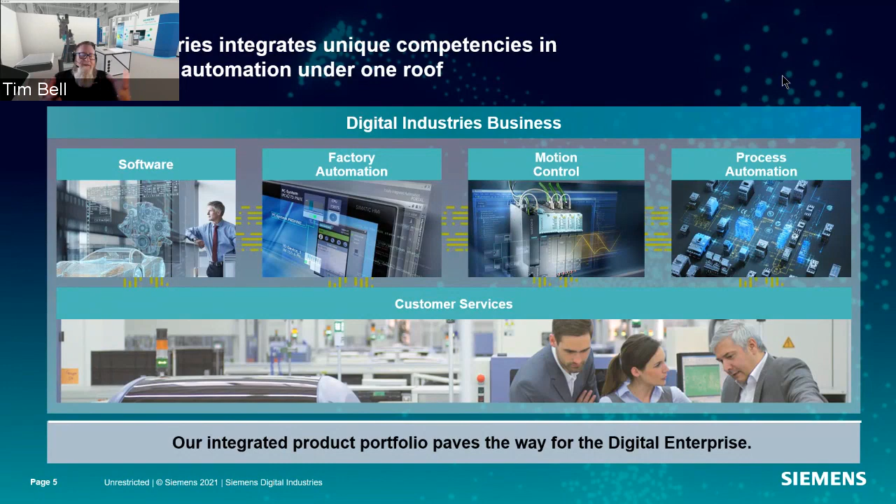Why Siemens Digital Industries? I won't go through all this, and we'll make the slides available afterwards. But basically today we ship about 10,000 PLCs daily, as the number one leader in PLCs, number one in industrial software, factory automation, and motion control. And I think what's most interesting on this slide is the global domain expertise. We have over 12,000 industrial software engineers and over 20,000 automation engineers. Siemens is very dedicated in supporting our customers in this journey.

Additive manufacturing is a core technology for Siemens as a supplier of end-to-end software, automation, and digitalization solutions. What a lot of people don't know is we have more than 10 years experience in using additive manufacturing, as well as being a service provider with our facility of Materials Solutions in the UK. Today we have over 150 industrial AM machines. I can tell you that about 75 of these metal powder bed fusion machines run 24/7 running production components.

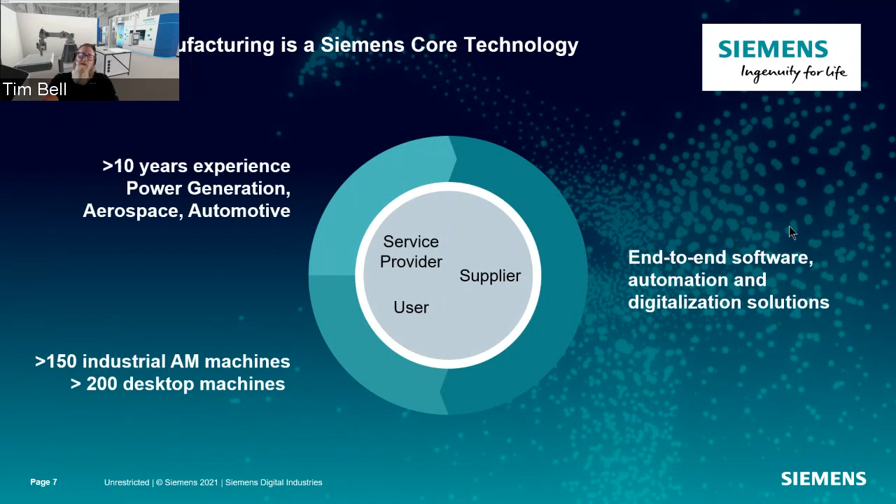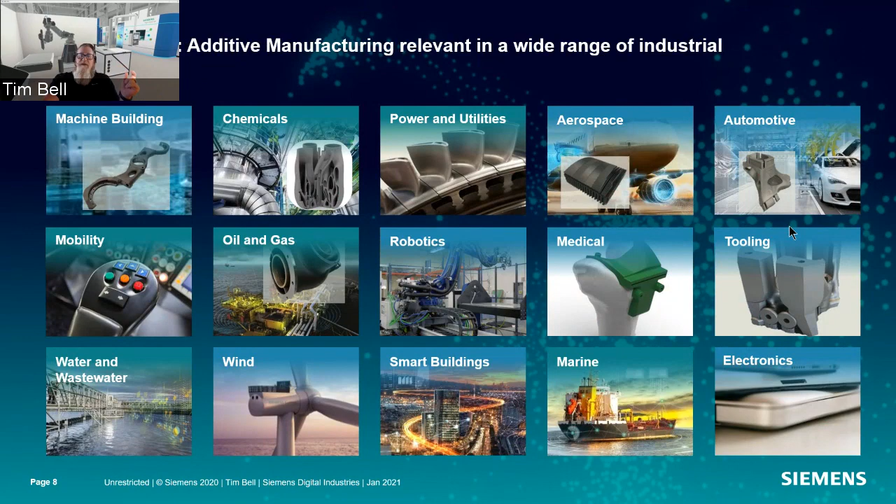We've got way more than 200 desktop machines floating around the world. I think we're getting closer to about 450 total machines globally now. When you talk about additive manufacturing, it's relevant in a wide range of industries, from machines to power to aerospace, automotive. I mean, it just runs the gamut. What a lot of people don't realize is there's even additive manufacturing components in some consumer electronics like the phone in your pocket. Yes, the answer is additive can do high volume production.

As it being a core technology for Siemens, we've taken things within our own and we've built tools around our own use of additive, and now we're bringing them to the customers out in the world. One of those examples is this conventionally manufactured burner. So this is a burner tip for a large gas turbine engine. It's traditionally made from 13 machined parts joined by 18 welds with thermal barrier coatings. And a big point there is 26 weeks lead time. Whereas optimized, designed as a single piece to be 3D printed, it's a 3-week lead time.

This is massive in the repair and service industry of gas turbine engines. To be quite frank, there's not a lot of brand new engines being sold in the world as we're trying to push away from fossil fuels to create energy. But there's so many engines out there that need service, and we're looking for better ways to make these engines more efficient, better performance, and get service parts out faster. So we leveraged additive here.

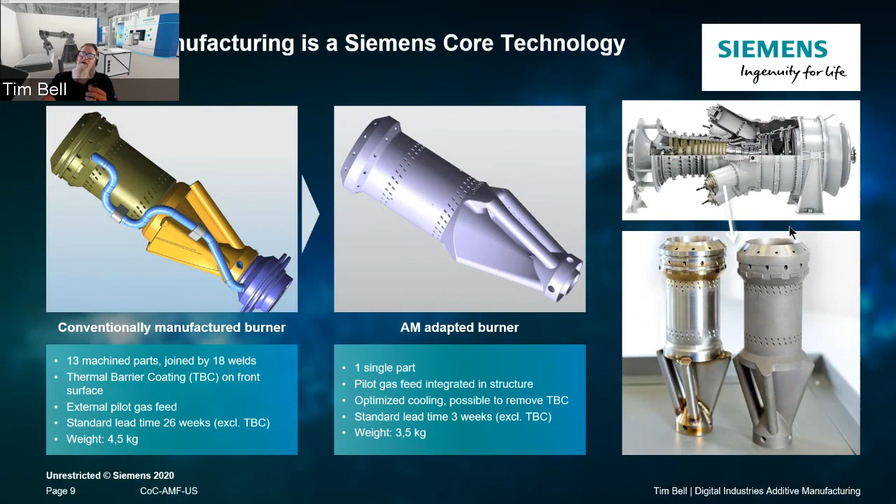Another place that Siemens has leveraged additive is within our mobility, where we make trains, our biggest market within mobility. We have 8 locations now, and over 800 parts are available for on-demand printing, meaning that a service technician can go into the train, have an iPad, pull up the component that's broken, even by just taking a picture of the component, and then the system will tell the customer, hey, you can print that on demand, and here's a pickup location. So today we've printed over 8,000 parts for our mobility group with over 100 satisfied customers.

This is where I talk about how we drink our own Kool-Aid or eat our own dog food. We use this for ourselves and for our customers, and additive has such a broad range of applications for us. Another area is our Healthineers group. These folks are responsible for building CAT scan systems, X-ray systems, sonogram systems, a lot of very complex medical machinery. And that team has utilized additive for rapid iteration, rapid tooling, things like that. So it's amazing to see, in this top picture on the left, the home style MakerBot or Ultimaker there. These machines are used every day in product design within Siemens.

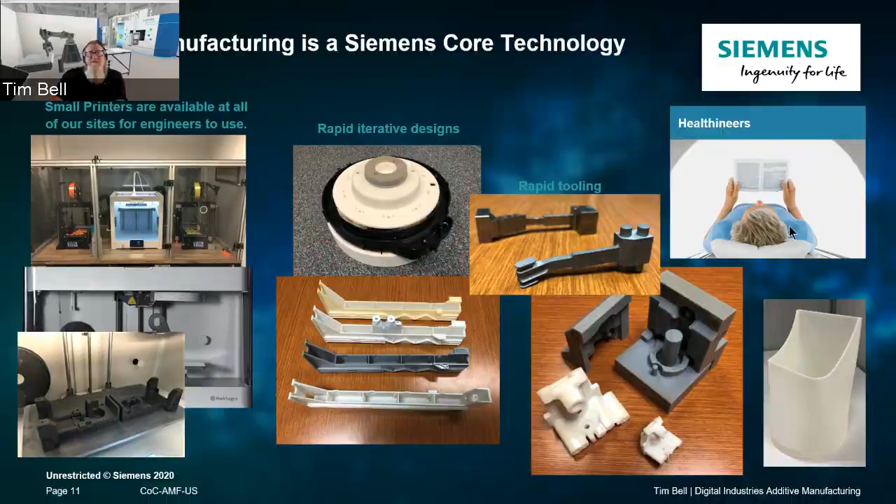So what are the drivers for industries? They're all different. Every industry has a different reason to look at additive manufacturing. It'll be product transformation or manufacturing transformation. Reimagine your products, scan to product, reduce weight. You can rethink your business, individualization, personalization. There's a new buzzword out, mass customization. We have tools to allow our customers to do that every day. But I think reinventing manufacturing is a really solid place to look at for eliminating molds and casting and tooling, simplifying assembly processes. Additive is used for so many of these things.

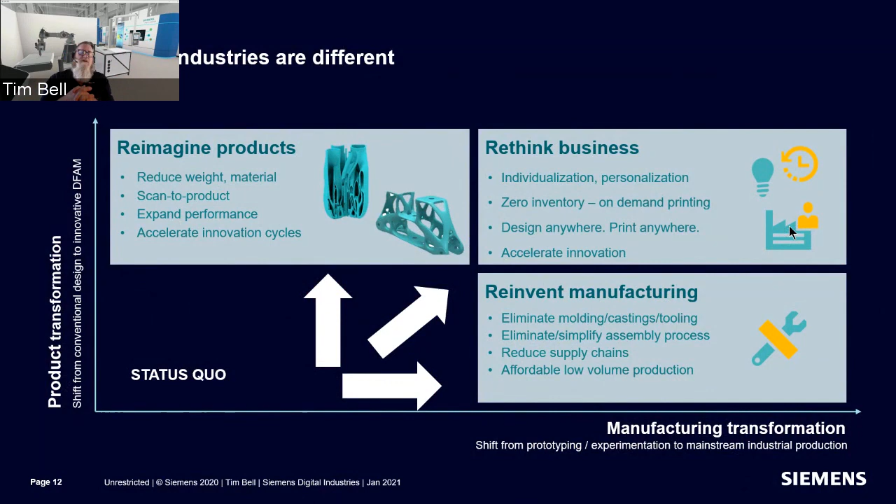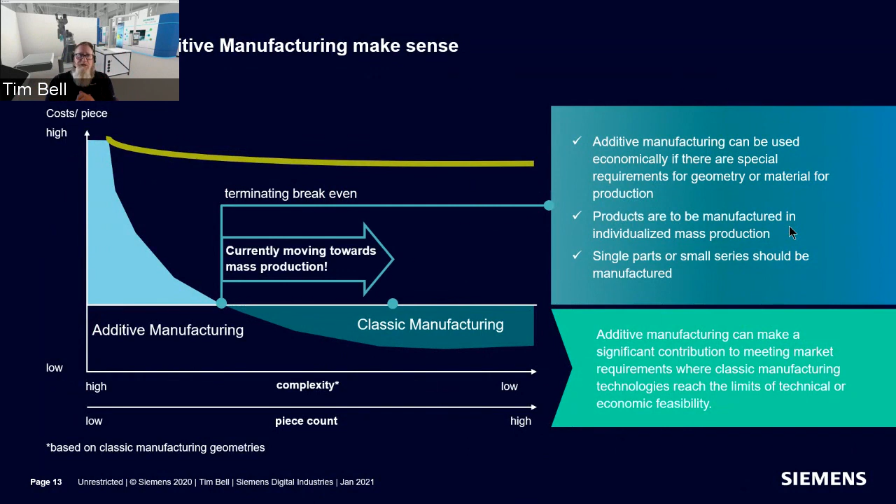Where does additive make sense? Well, it's typically in high complexity components that have a high value. But what we're seeing over time is the additive technology is being enabled by digitalization to move towards mass production. If you follow additive manufacturing news, you saw recently where ExOne, one of our great customers, announced their development with Ford, where they productionized binder jet with aluminum. This is a huge step towards additive going to mainstream mass production. The market's growing strongly. The CAGR for the additive market is about 25% annually. This is huge. This is massive. This tells us that it's on the way to becoming mainstream.

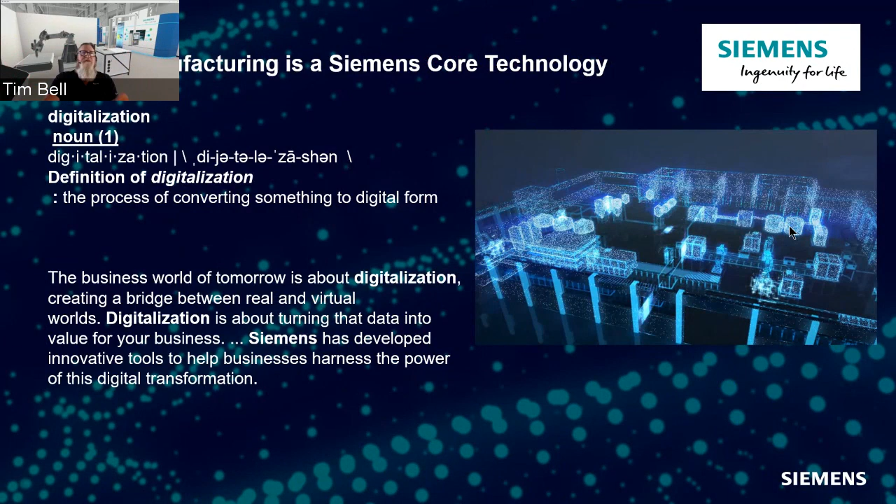So how do you leverage digitalization for additive manufacturing? Well, let's look at digitalization. It's a pretty basic definition: the process of converting something to a digital form. Well, that's kind of misleading. You can't just convert it and say, oh, I've digitalized my manufacturing process. What Siemens has done is given you the ability to connect the virtual and the real world. This is digitalization. We're so used to designing components in CAD systems, and then we move that over to software, do simulation, and then we send it to the shop floor, and that machine's disconnected, and we try to put all these pieces together to make a solid manufacturing process.

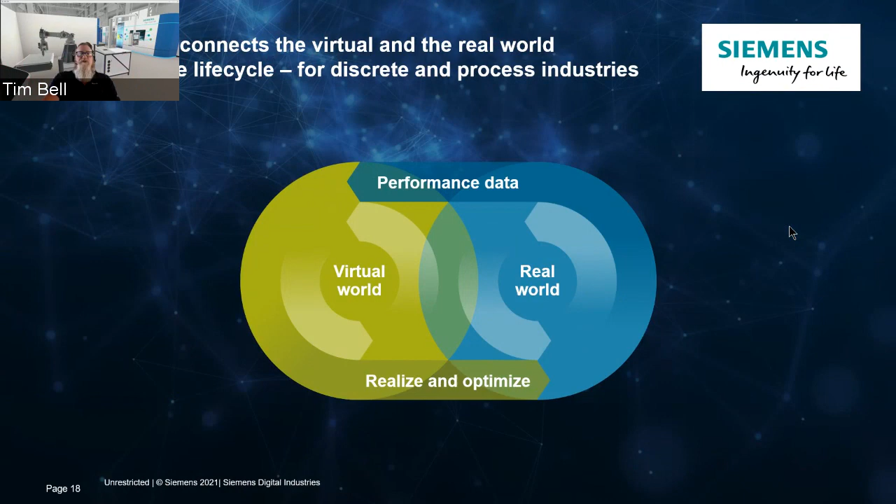Unfortunately, today we don't have that in the additive world, but Siemens is bringing that to the forefront today. The barriers to additive manufacturing are the same as other ones. It's what I just said: design, simulation, print preparation, the process, heat treat, finishing, inspection. All of these are a disconnected process chain.

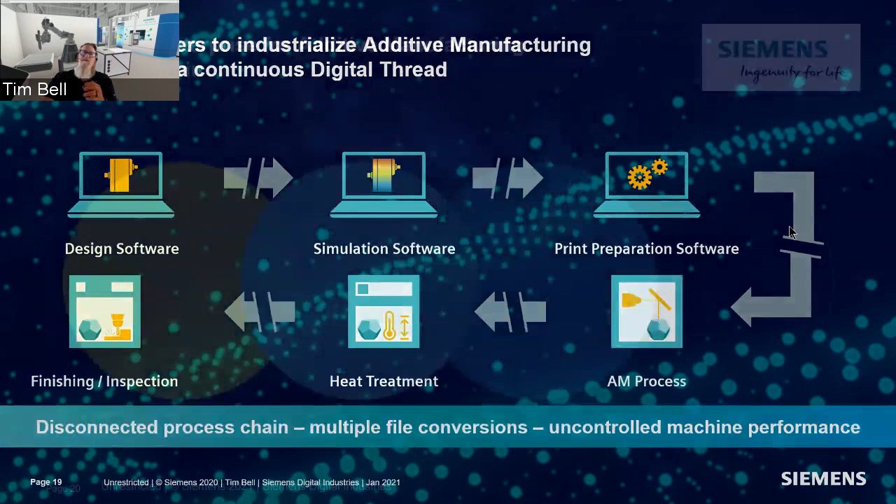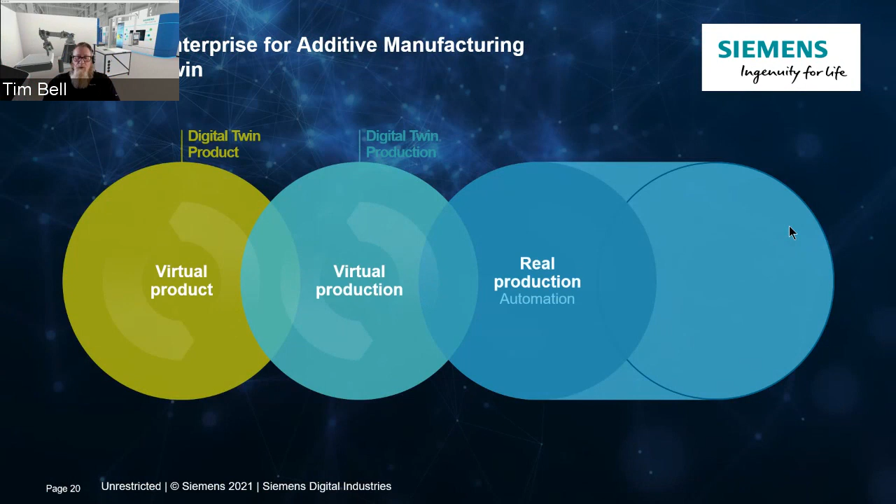So many different platforms. What Siemens has done is we've tried very, very hard to create a digital enterprise, allowing you to, I don't want to make this a software pitch, but basically go into a software platform and stay in it for the entire path. So from cradle to grave, and then more importantly, the digital twin performance. So feed that performance data back into the virtual product. And I'm going to show an example of that here.

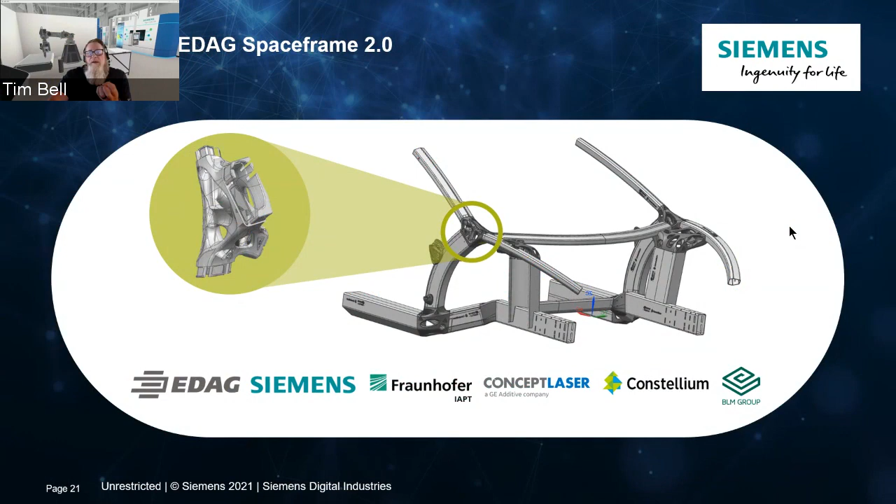So let's start out with a digital twin of the product here. So I took an example here. This is an automotive space frame component. So you see there's a node or a module there where some frame tubing is connected, and the module there is 3D printed. So digital twin of the product. We start out with designing the product.

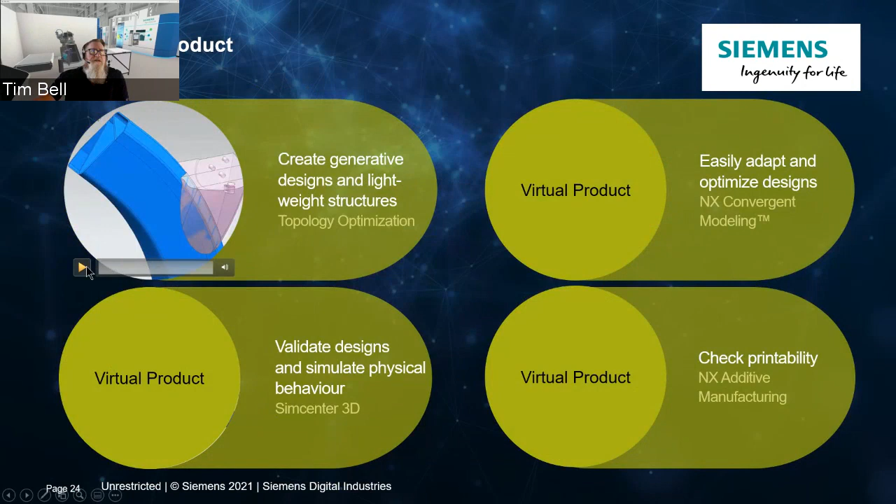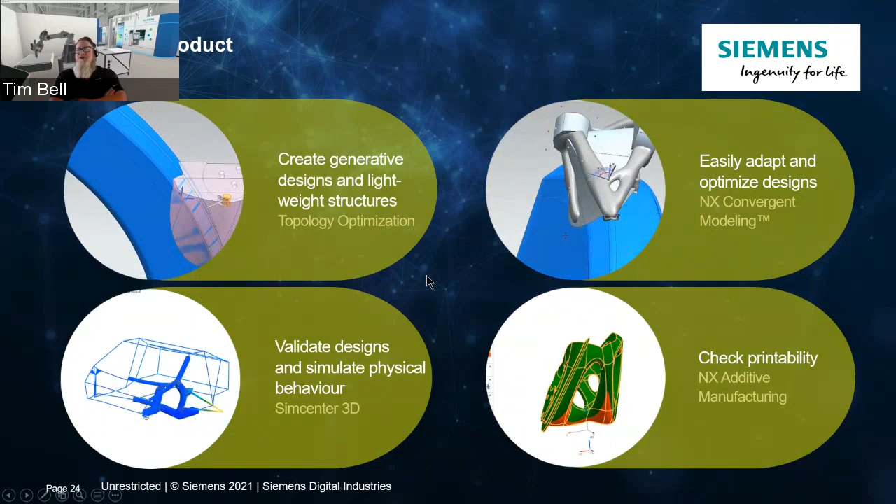We're going to use generative design, topology optimization, and then we're going to take that design and bring it into convergent modeling, where we can move it around and do some more things and make it more fluid. Then we can even validate the design's physical behavior in the same platform, and then most importantly, moving that same model, never leaving the same screen, and checking the printability.

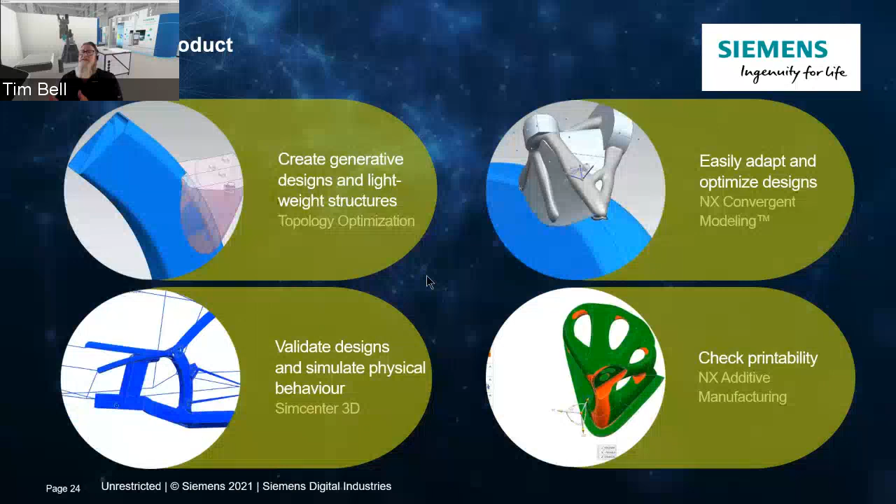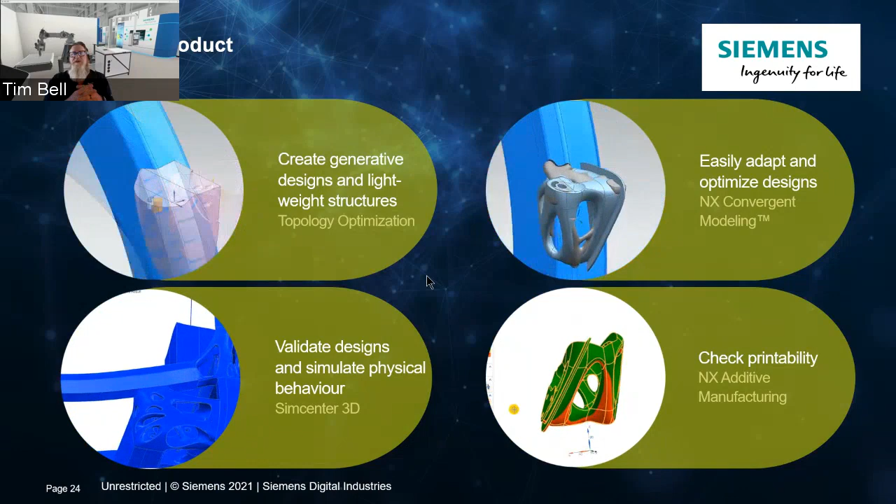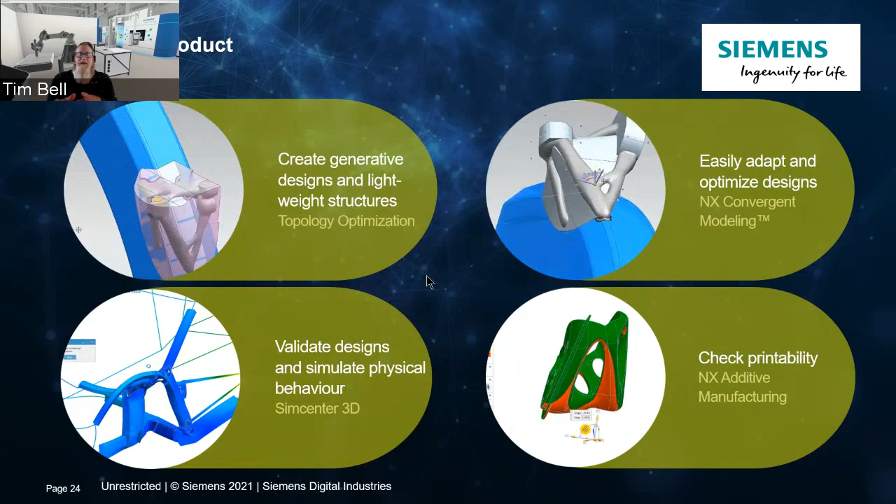This is the key to additive manufacturing, because the processes are much more variable than traditional manufacturing. So there's a lot of things that go on. You've got a lot of stresses. You've got a lot of influencing of the build based on the environment or the health of the machine. So being able to check printability, optimize the design, validate the physics of the actual component in its atmosphere, being able to do all this in one single digital twin starts to change the way we manufacture.

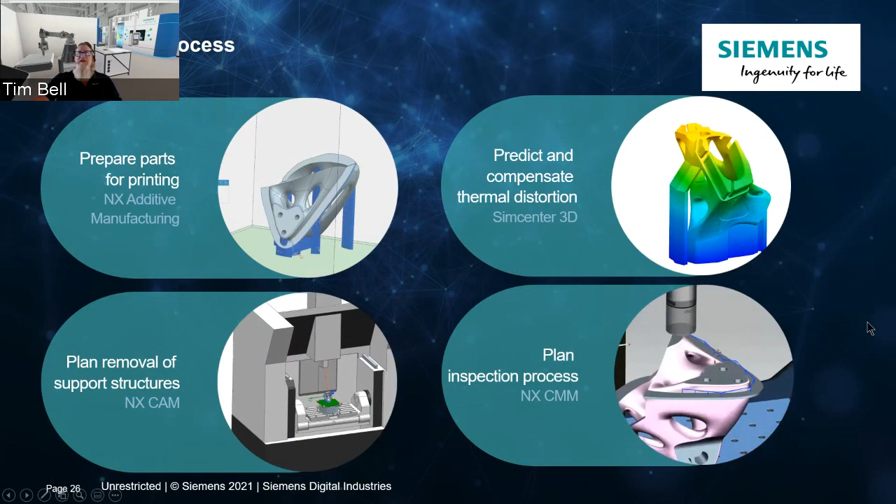Now let's look at the digital twin of the production. Here, we can prepare the parts for printing. We can predict how they're going to print. We can also start planning post-processing, whether it be part removal, inspection, whatever it might be. So again, you've got the digital twin of the product. So you've designed it, you've simulated it in its environment, you've checked its printability.

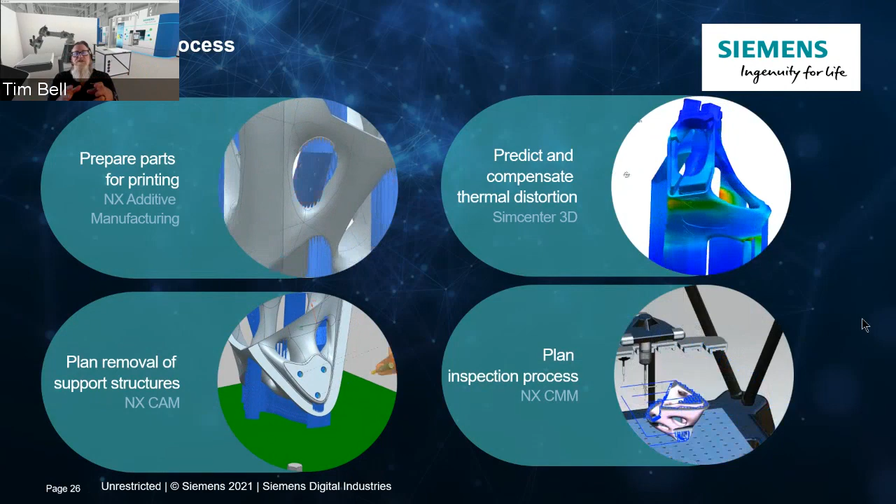Now you're going to come over to the digital twin of the process. You're going to prepare the parts for printing. You're going to add support structures, you're going to orient the components on the build plate. You're going to predict and compensate for the thermal distortion. If you've ever done any 3D printing, and you know with metals specifically, you're going to get a lot of distortion.

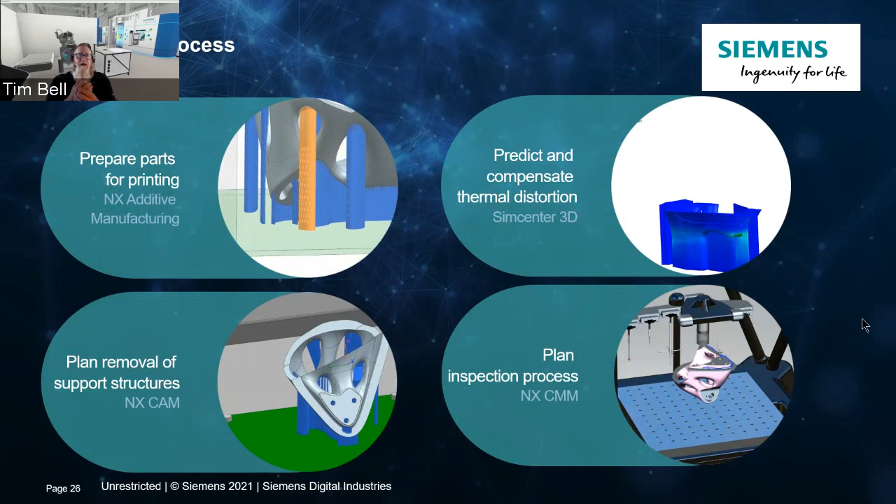Planning for the removal of support structures is key, because if you ever had to remove any, it's a pain in the butt. And then even being able to do the same thing, never leaving the software, and do your inspection process. This has never been done before with any other technology other than maybe mold making.

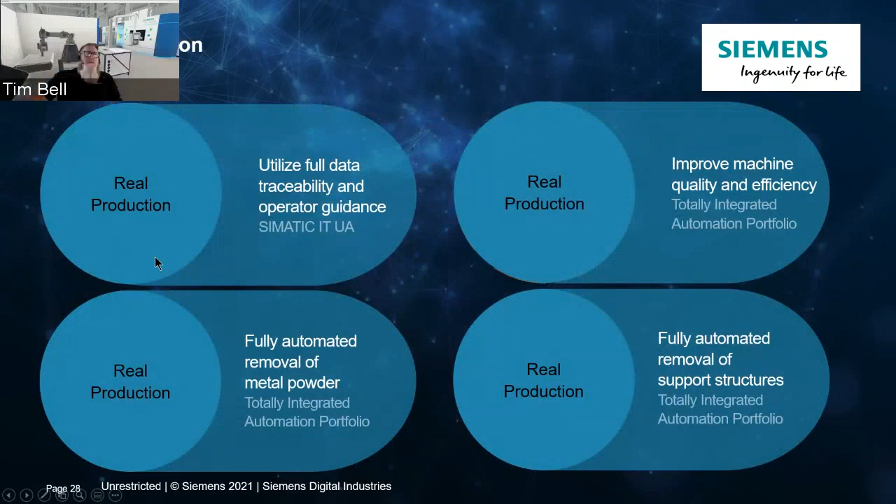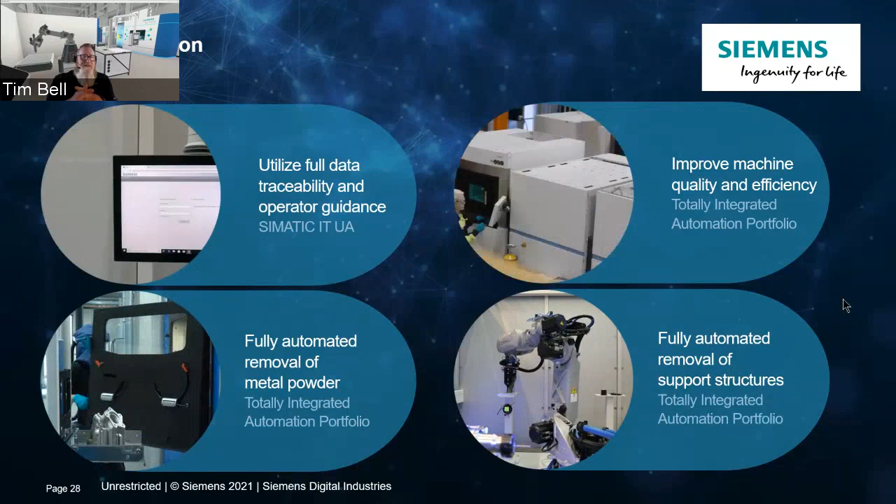Now if we go on to the real production, connecting the equipment. This is the true point of digitalization. Connecting the equipment to this digital twin of the product and the process. So now, equipment that utilizes Siemens PLCs, IPCs, CNC controls all have the ability to be connected.

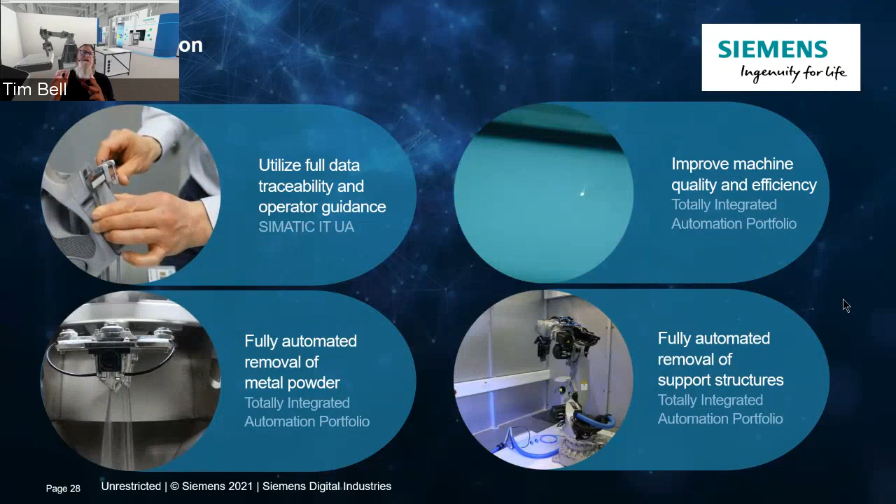When I say connected, they can be connected to an MES system. They can be connected to a Teamcenter, a PLM system. They can be connected to an ERP or a master scheduler, and they can all be together as one. You can see what's on machines, what's running, how much time is left, and even go so far as to start collecting OEE data. Now we're getting into the real stuff. Now we're talking about the real product.

Now imagine we virtually designed the product, we virtually produced it, now we've actually produced it, now we have results, and we can take those results, whether they be physical from the component or whether they be digital from the asset, the machine, the feedback from the machine, and we can feed it back to the beginning again and have a continual improvement process where our product is always getting better because we're measuring the outputs, comparing them to what they should have been, and making changes accordingly.

Hope everybody kept up with that.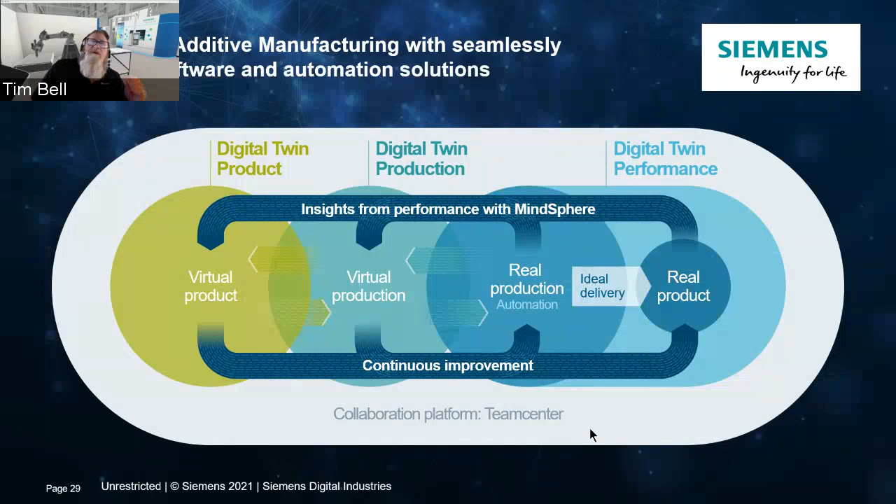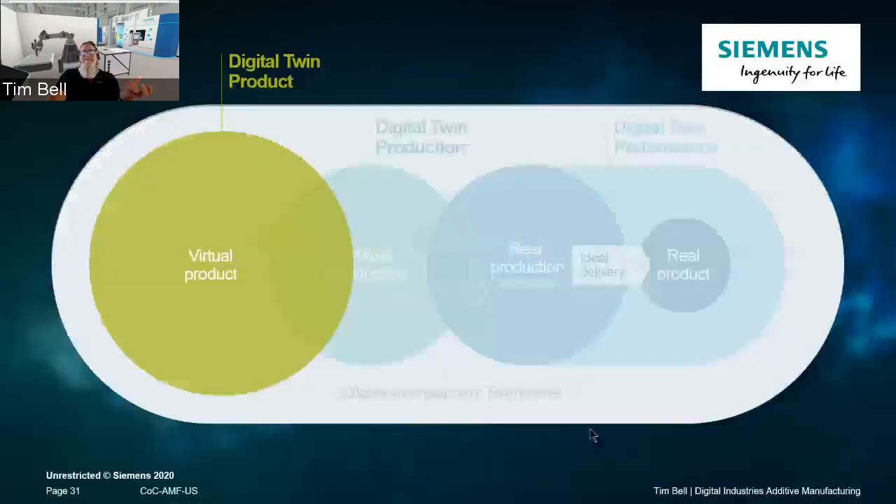Now let's talk about digitalization of an additive manufacturing machine. So we talked about the product, the part, the process, the real world. Now you can take that same philosophy of a digital twin of a product, and you can design a machine. And say you design the machine, it doesn't have to be NX, but it shows NX here. You've designed the machine, you have all the kinematics ready.

Now the problem always happens with building a machine is you spend all this time designing, you have to wait for all the hardware to get in, start assembling all the hardware, checking for all the fit and function and movability and axis squareness and level and plane. And at the same time, the electrical engineer or the automation engineer is looking at you like, hurry up, I need to get my stuff in here so I can test my code.

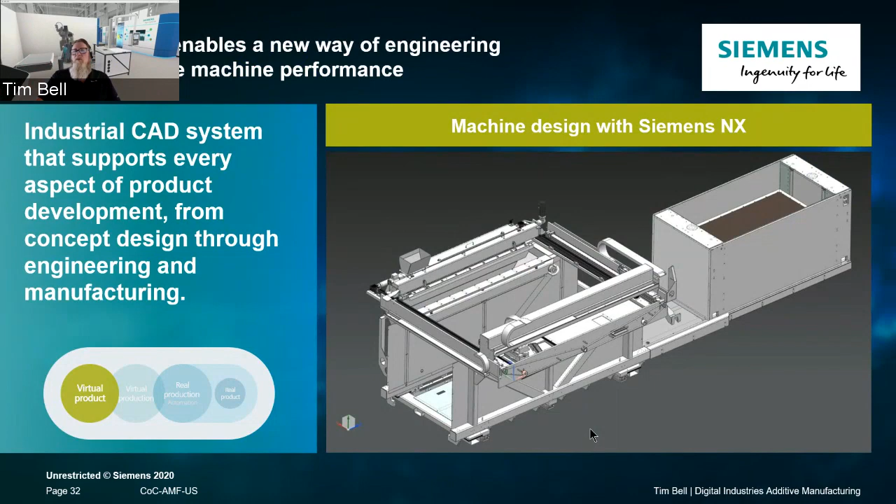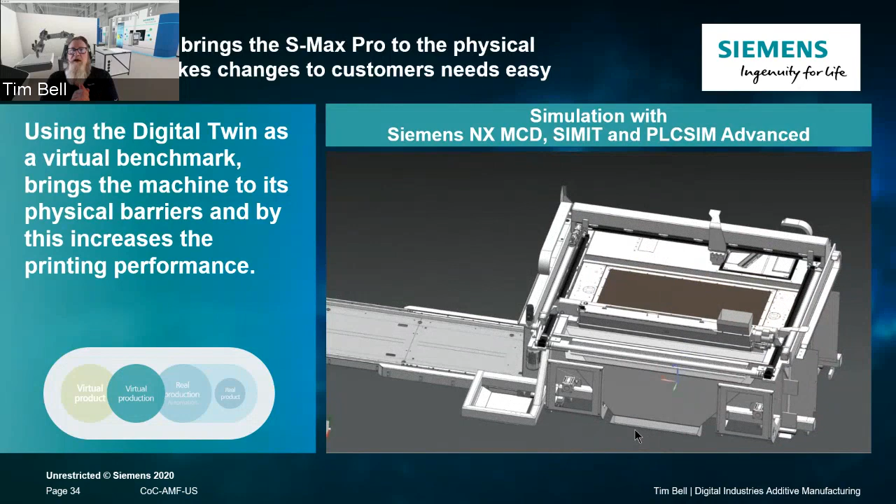Well, what we've done is we've taken that same approach. Take the kinematics, add multi-physics to them, simulate the actual machine with gravity, with weight, with force. Now also add a simulation of the PLC. Here we talk about our Siemens NX MCD, that's a mechatronics concept designer, and SIMIT and PLCSIM Advanced.

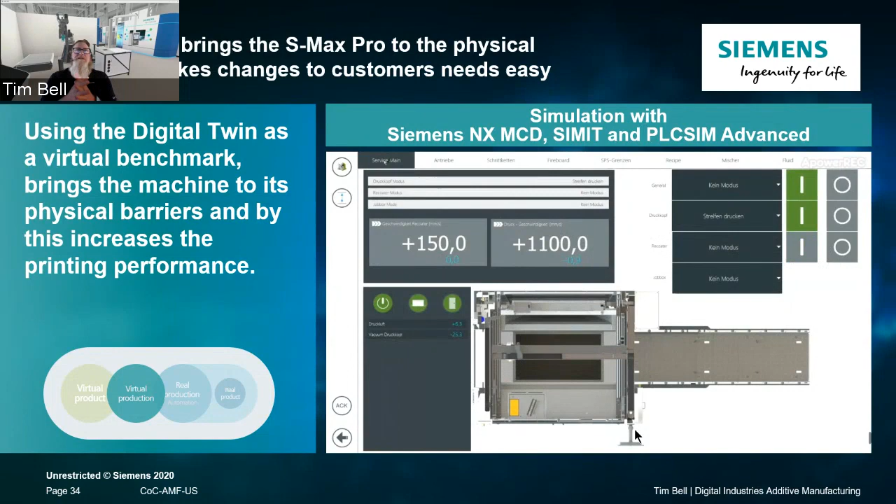So what you see here is ExOne's latest printer that they released about a year or so ago, the S-Max Pro. They literally did all of their development virtually. The physics of the machine, wrote all the code for the PLC, did the testing and development of the PLC code on the actual multi-physics kinematics models, and were able to troubleshoot everything months before the machine actually hit the floor.

They've told us that in the past, a new model would take them 3 months of commissioning on the floor for the first system. They did this in 3 days once the machine arrived. This is groundbreaking. While it's groundbreaking for them, for their development of their systems, I think what's more groundbreaking is

COVID happened, and they needed a way to train their customers without being on site. And they were able to use these tools of their virtual commissioning, the digital twin of that machine, to train their customers, train the service personnel, and literally walk everyone through. And when that first machine was delivered, their operators were ready to go when it hit the floor. It's an amazing story, and we're so proud to be part of this.

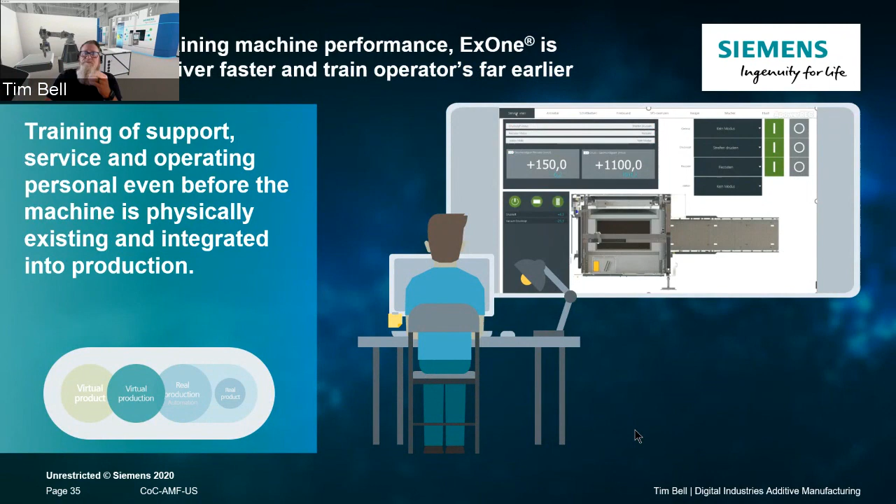And the real production. This particular machine is equipped with Siemens hardware, our S7-1500 controller, which is probably the most powerful PLC in the world, our IPCs, standard industrial communications with Profinet and OPC UA, our standard drive systems, an S120 compact drive, our servo motors, industrial controls, distributed I/O, and on top of that, this was all engineered with

what's called TIA Portal. TIA Portal simplifies the programming of a PLC process by allowing you to go into a portal that has almost every type of machine motion pre-configured in a menu. Because even though this is a 3D printer, it's got an x-axis that moves. Well, that same code has been written for thousands and thousands of other machines. You could pull those down, and you don't have to write all the code to the PLCs. Use TIA Portal to your advantage.

You can use WinCC HMI to develop the HMI the way you want, and then you can even have remote connect. What ExOne did was they went to the next level, and they took our MindSphere, it's our Industrial Internet of Things operating system, and they built applications for their customers. They call it 3D Live.

Their customer actually has an iPad or even their iWatch or tablet or desktop computer where they can see live what the machine's doing, whether it be print job information, layer state and progress, powder and binder fill levels, and transparency on the operations. So what they've done is they've created live OEE, overall equipment effectiveness. More importantly, they also have the ability to measure the quality coming out of the machine based off of the feedback from the motors and the drives and the controller and the switches and the sensors.

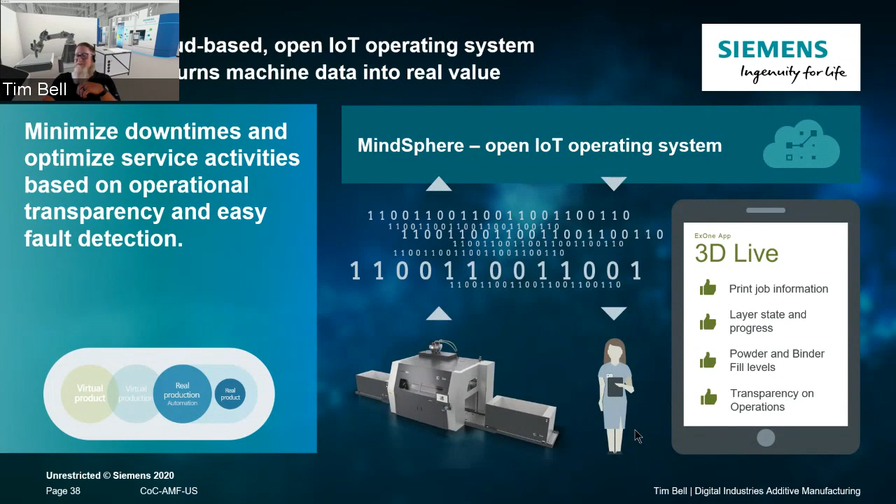So not only are they using this digital twin and this digital thread to produce a component, but also manage the quality, manage the efficiency, and most importantly, manage their productivity, which is performance and revenue, because that's what customers buy manufacturing equipment for, is to generate revenue. So here's a great example of how they seamlessly integrated the software and automation solutions into this digital thread. Again, the digital twin of the product, the digital twin of the production, the real production, and the real product.

There's a good screenshot on the right there on that laptop showing the dashboard of running the machine. And you can have multiple machines. Interestingly enough, you can run this on AWS cloud, or you can have an on-premise cloud to run these, because we have a lot of defense customers. In the additive industry, there's a lot of defense customers, and they demand an on-site cloud system.

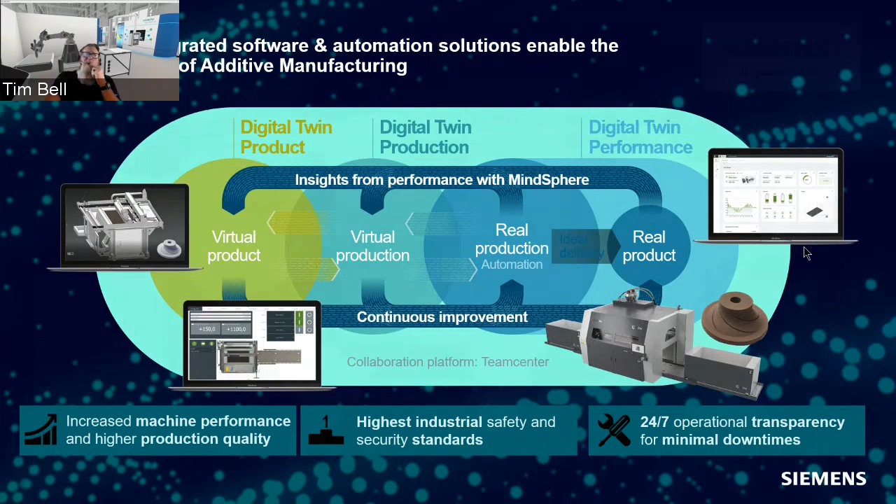Interestingly enough, we have a product called SINUMERIK Run MyRobot Direct, where you can actually program a robot using G-code that comes from a standard CAM platform, or writing it longhand even. This is changing the way people look at robots. And we also have the ability to make robots much more accurate than they traditionally are.

Moving on, I'm going to show you an interesting design from simulation. When I talked about the digital twin of the product and the digital twin of the process, imagine, you've all seen generative designs and topology optimization. Typically, this is done by some physical constraints of a component in an assembly. And the topology optimization is usually lightweighting and trying to take advantage of additive. But part of the problem with topology optimization is people have a hard time, if it's a structural component, accepting that futuristic looking design. And how do I use that? And how do I sign off on that?

Well, what I'm going to show here is how our partner HP literally took a component inside of their 3D printer, used our CFD software, STAR-CCM+, to redesign the geometry for maximum flow without any respect to a manufacturing process. Meaning, typically when you design something like a duct, you're designing it around how it can be made.

Rather, in this video I'm going to show you, and I apologize if there's not sound, we have a technical problem this morning, but I'll walk you through it, where we use CFD to generate the design. At the end of the day, this new part reduced the cost by 34%, but increased the flow to 23%. I apologize, you can't hear the sound, but this is how CFD optimized. On the left, you see the standard part.

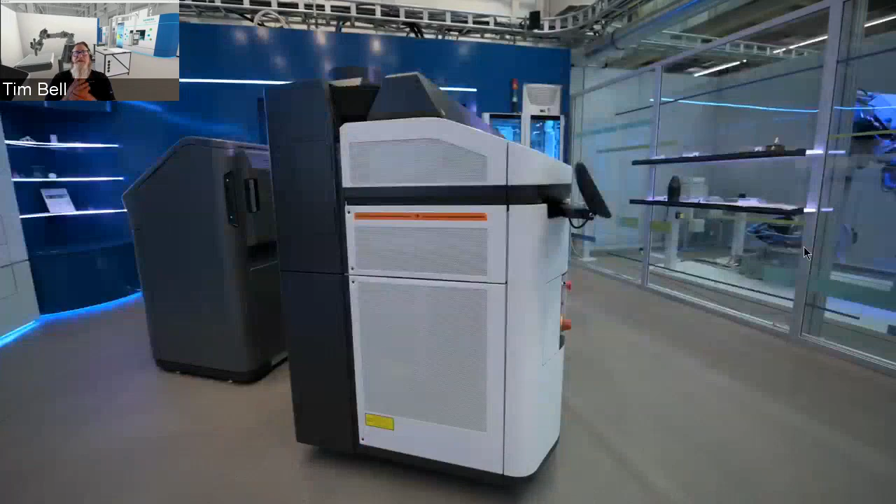On the right, that's my wonderful boss, Dr. Karsten Heuser, based in Germany. Here you can see a gentleman using NX CAM. He was doing some nesting. Here we're talking about leveraging simulation to generate the design.

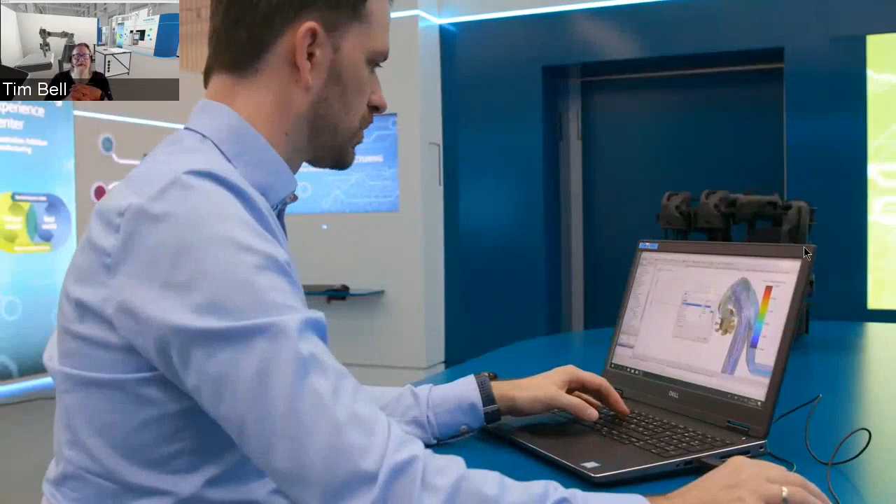On an HP printer, for an additive printer, one of the problems is keeping the ink or the jetting nozzles cool. If you don't keep your jetting nozzles cool, you're basically squirting out glue. And if you don't keep them at a specific temperature, the viscosity of the glue is not where you need it to be, and you're going to get zero performance and clogged nozzles and all these things.

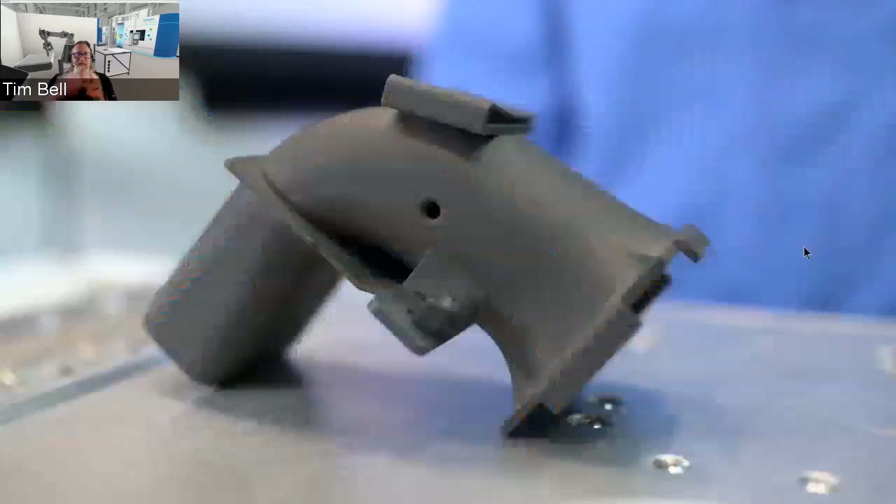This came from having a meeting with HP and trying to figure out what kind of part can they demonstrate generative design and topology optimization. And no one ever thought about this duct. It just happened to be sitting on a table. They picked it up. So this is the traditional duct. It's printed on one of their systems. Here you can see it in the design.

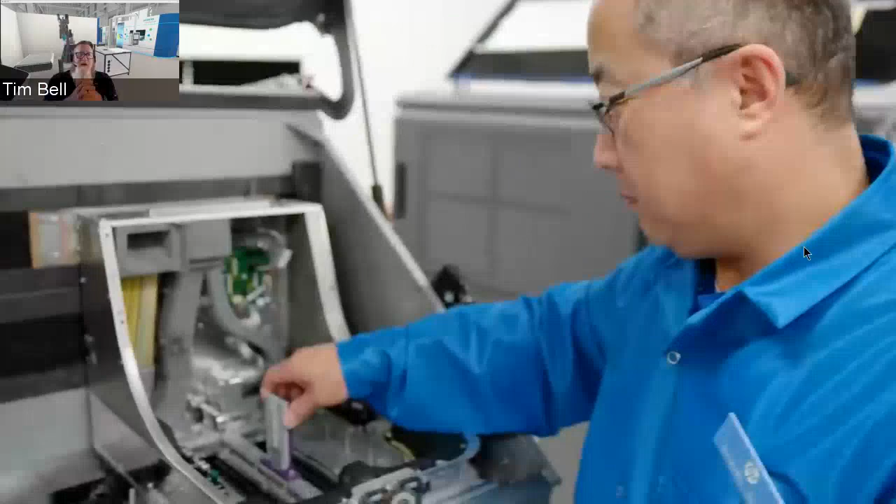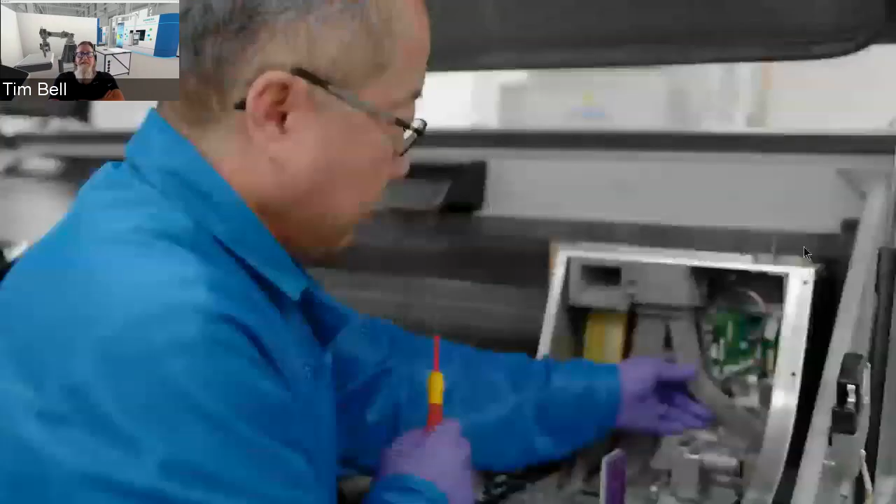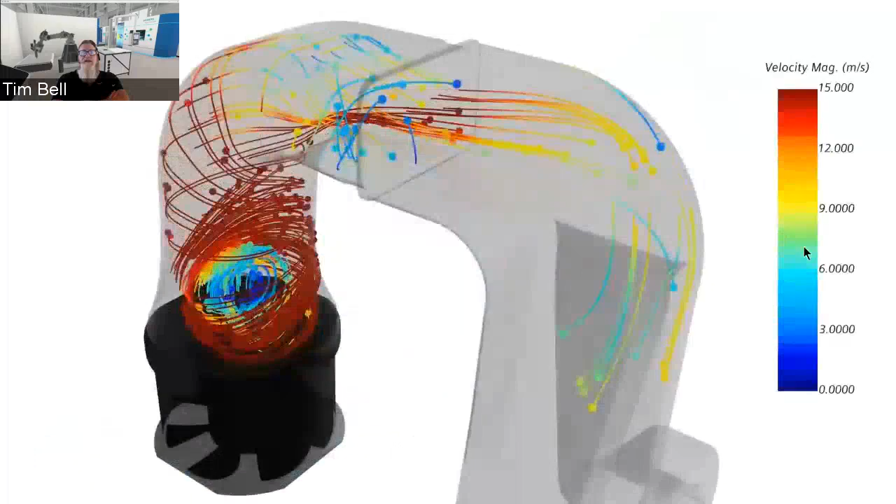So we went through some simulations to say, okay, let's take this duct and let's use CFD, optimize the flow. The traditional duct had a lot of waste in it and a lot of losses here. You can see the turbulence, and you can see there's just a ton of losses in that. Now, here's the new version, and you can see the losses are much less. And what's interesting is this shape.

And Ashley talks about here how you had to take this output data, and you can see this. The output data was just voxels. There's just blocks of information to say, this is the shape. Then he had to turn this into a thin wall. Once he had it into a thin wall, he stopped and looked at it and thought, what in the world? I would never have imagined designing a component that looked like this.

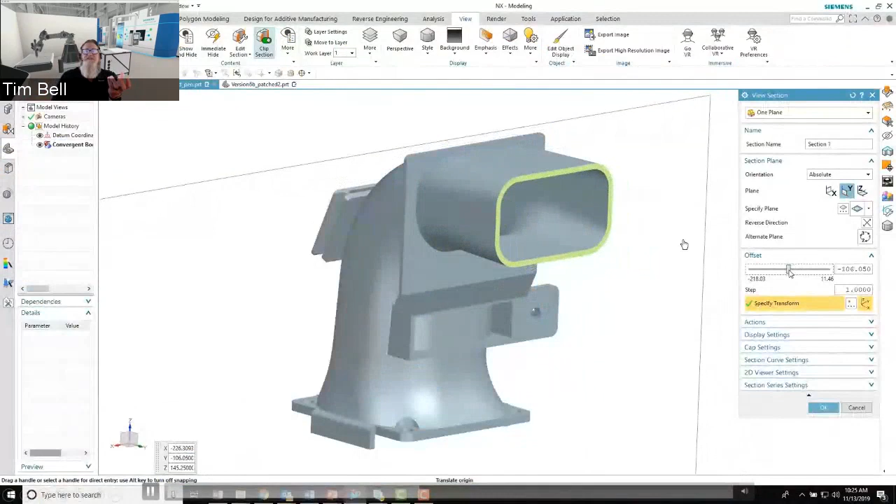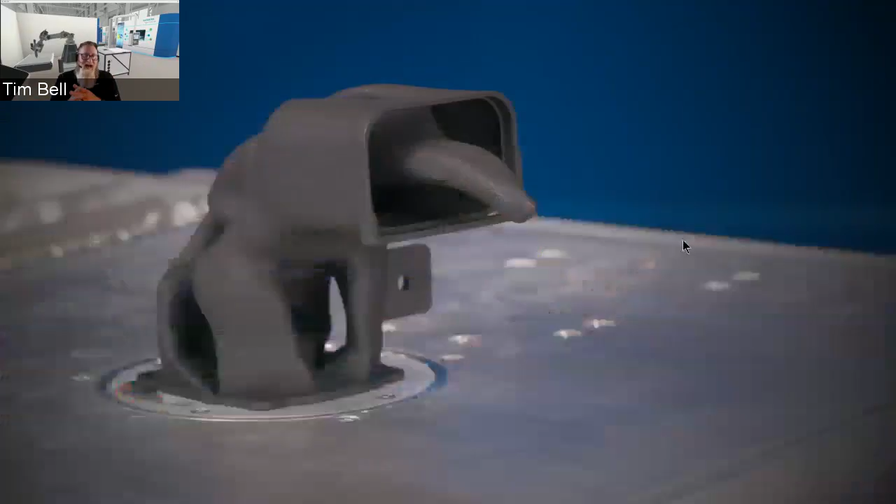You know, typically, you would design all the fillets and radiuses and wall thicknesses and brackets. But in this, you just said, this is the beginning, this is the end, use the flow data. And yes, it looks like a tongue sticking out the end of that. Again, no one would ever design that component. It required designing from data.

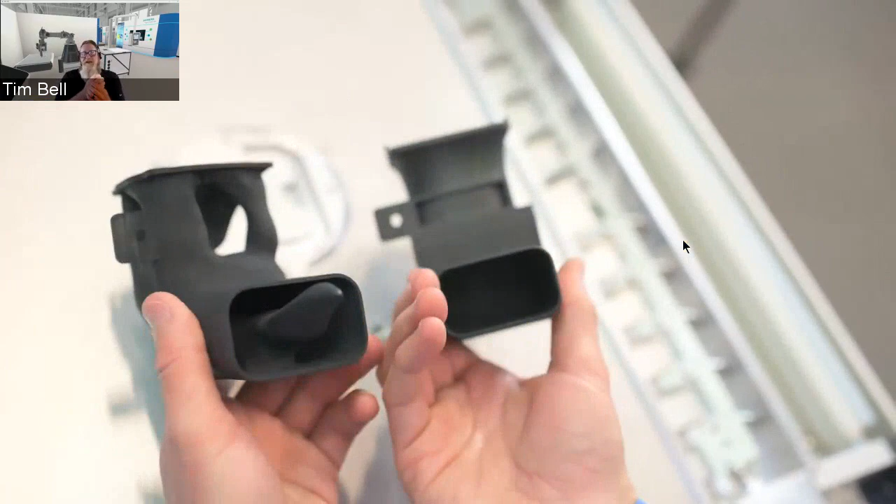Interestingly enough, we've added some more functionality to our NX design platform to allow you to do algorithmic designs even. So we're taking this digital thread and digital thought process to the next level and designing smarter components, not just components that fit the bill, if you will.

Jump through here a little bit. Since we can't hear anybody talking, there's another good view of this. And if you want to see this video, it is online. You can access it through YouTube, Siemens HP Duct. I can share that as well. There you can see the 2 versions of it.

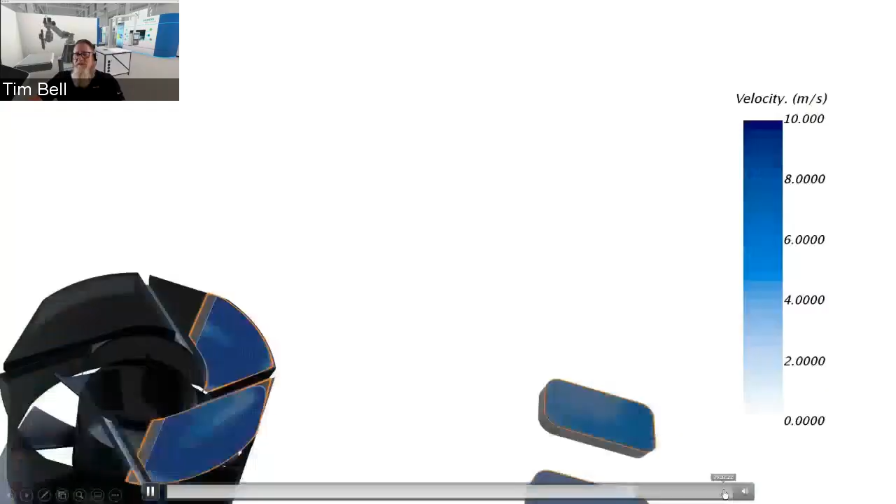So anyway, that's a great example, and we have many of these examples of printing a design that historically you would never have been able to do. So I've talked about the digital thread and the digital twin of the product and the process equipment. Now what's next? Next is the factory. In our world, working with so many of these additive manufacturing machine OEMs, they come to us with the hard problems. If it was a problem in their wheelhouse, they would solve it themselves.

But they came to us and they said, hey, with your virtual twins of the machines, actual kinematics and physics models and the PLCs, can you simulate multiple of these machines in a factory? We said, sure we can. We have a product called, it's Factory Sim, basically. It's Tecnomatix Plant Simulation.

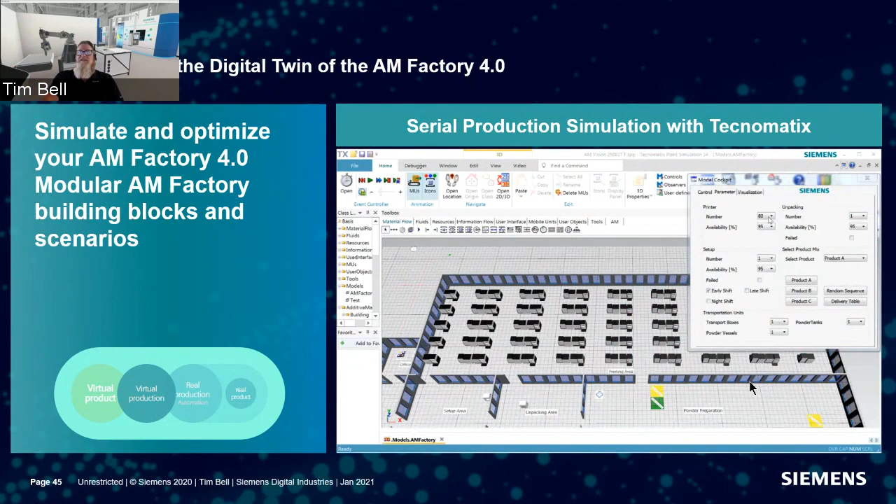And the reason was a customer went to a large powder bed fusion manufacturer and said, hey, we need to buy 65 of these machines. Can you verify this? And the manufacturer said, yeah, as best you did with some spreadsheets. They came to us and said, what can we do? So we built a model. What you see here is the EOS M300, which is the newest EOS machine, and it's 100% Siemens controlled. And you're going to see some AGVs that are 100% Siemens controlled.

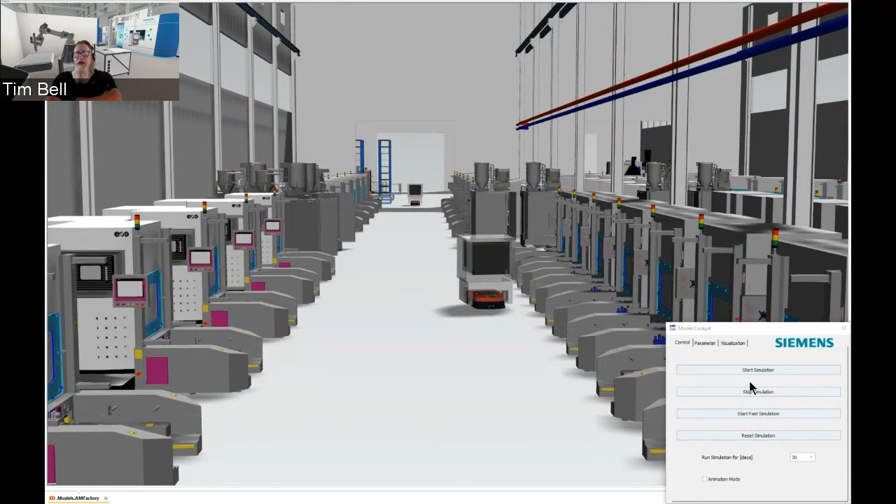What we were able to do was take a specific component, start processing it in the machines, start building the shop floor to determine, based on a number of components per year, how many machines they would need, how many AGVs they would need, how many powder separation systems, how many build boxes they would need, how many post-processing machines would they need, whether it be robots or 5-axis machining centers, and built this factory virtually.

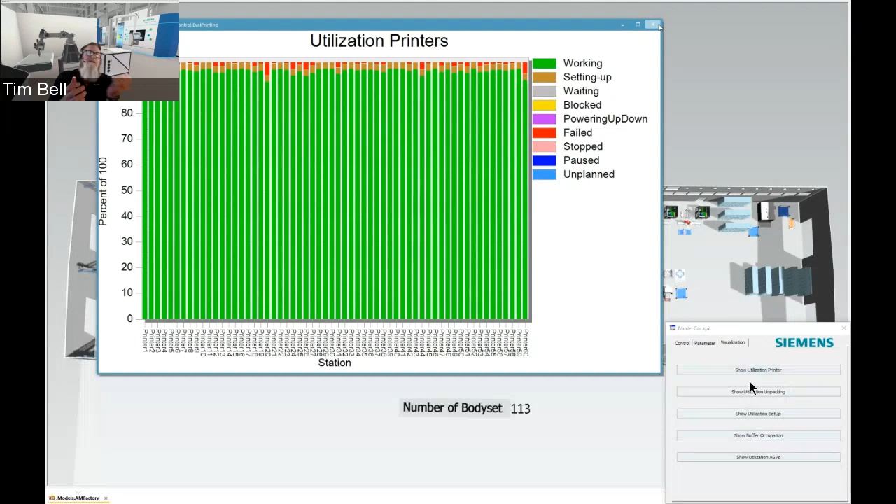And this isn't just pictorial or video simulation. This is actual simulation of the factory, machines actually running. And we start doing the simulation. And as soon as it pushes play here, it says, okay, number of body sets is 113. And then it can visualize it. You can see all the utilization parameters. So this is for the stations, for the printers. You can see utilization for the unpacking stations, the utilization for a setup and buffer and all these things. So now you can understand where your time is being spent.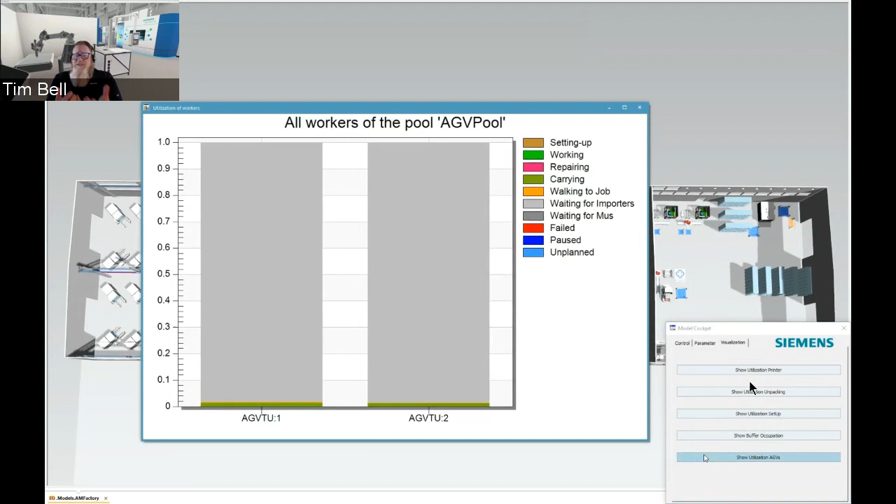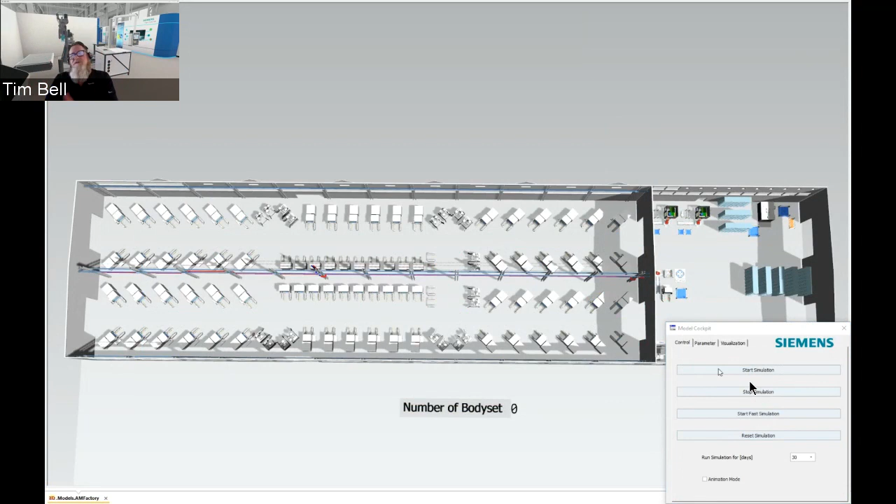What is interesting about this is if you start pulling on the levers and knobs, you find that you really don't need as many machines because you can optimize things. Optimize the plant layout so that your AGVs are traveling less. You can start changing the number of parts per year, the number of machines. It'll tell you how much availability. At the end of the day, this customer really only needed 30-some. This was huge. Coming into the project thinking they needed 60 machines, they only needed 30-some machines, was just amazing.

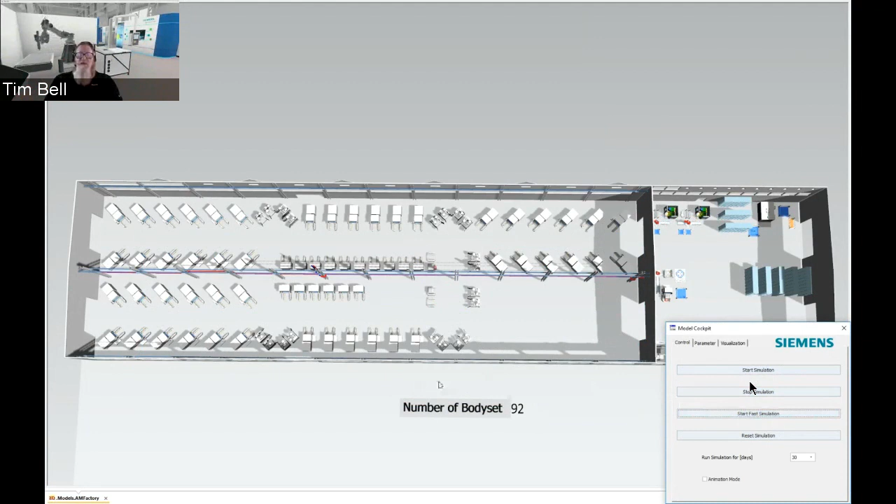What was even more amazing was to streamline the efforts. They were able to start manipulating the part design, so the digital twin of the product, and watching the impact on the shop floor all the way to the end. So think about when I show those circles and closing the loop and getting the OEE data back and feeding it back to the beginning. Now imagine taking your shop floor and optimizing the shop floor around the part design. That's another example of digitalization in your factory.

Switch gears just a second here. Siemens, being who we are, we have facilities around the world where we can actually share our experiences with customers. What you see here in the picture is the headquarters for the AMEC, which is the Additive Manufacturing Experience Center in Erlangen, Germany. This is where my team sits. In this facility, we have robots, we have DMG Mori DED systems, powder bed fusion systems, multi-jet fusion systems. We have a lot of different machines. We have all of our software.

We have all these digital twin tools set up so we can bring customers in and either give them the experience, show them how it works, or even run through a collaboration effort with them. This is huge because anytime we talk to someone about digitalization and that digital thread from end to end, it's like setting an elephant in the room. It's a giant undertaking that even some of the largest companies in the world we meet with look at us like, how do we do this?

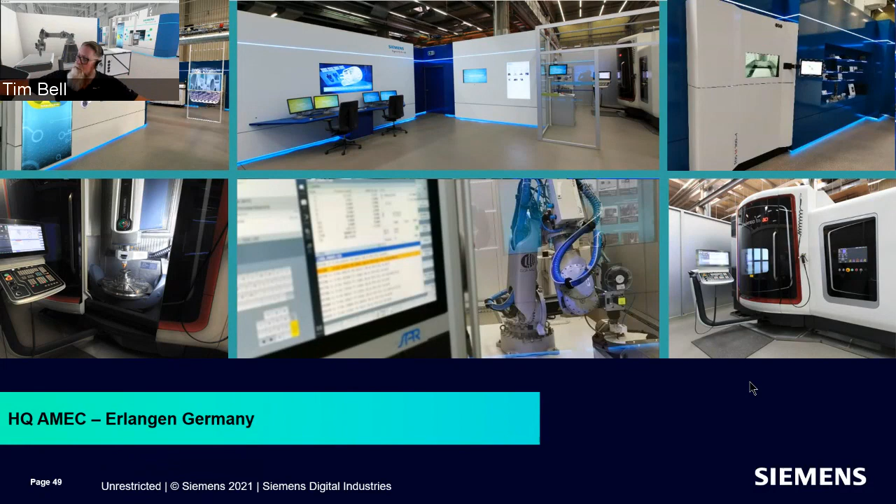Well, we've built this system up so that you can eat that elephant one bite at a time. You don't have to take everything from PLM to industrial Internet of Things. You can take the pieces in between. That's why we've created these facilities. We have the HQ in Erlangen, Germany. We have an Additive Manufacturing Technology Center in Singapore. We have a demonstrator at MXD in Chicago we're working on. We have a demonstrator in our DEX facility in Campbell.

And then most notably is our facility here in the U.S. that I'm responsible for. It's called CATCH. It's in Charlotte, North Carolina. It's the Charlotte Advanced Technology Collaboration. We're also planning a demonstration at LIFT in Detroit, Michigan.

We spent a lot of money building this experience center in Germany, and we were open about 9 months, had about 4,000 visitors come through there, and then COVID hit. And we thought, okay, we can't bring people through here. What do we do? Well, we're the experts in digitalization. So we created a virtual version of this, and we can schedule this for anybody who wants to see it. And I can take you on a virtual tour through this facility and run through use cases and software and machines, show you how it all works.

And I'm absolutely pleased to say that we can do these things and show our entire portfolio, whether it be field device level, controller level, industrial edge, MindSphere, security, even some AI and some machine learning stuff we can show through here. And this is the interesting thing about Siemens: we cover this entire block, and we don't make machines. We don't make robots. We only make the solutions that will allow those things to work.

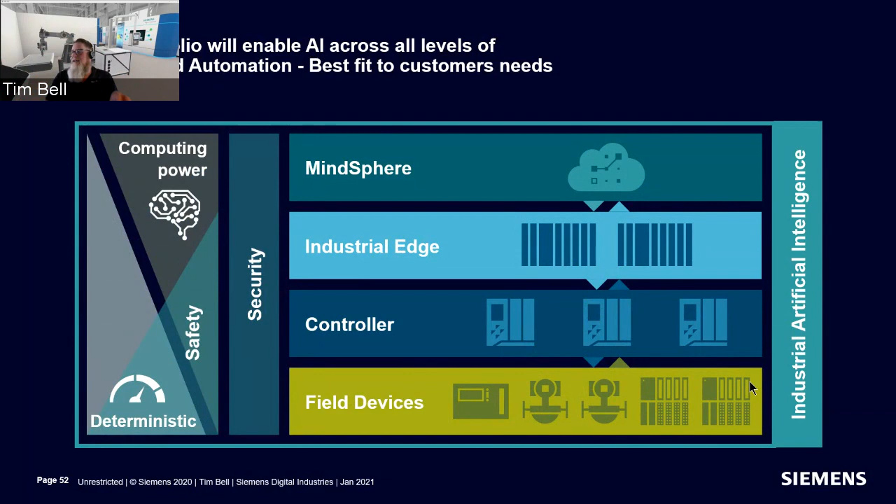Offerings are pretty simple. We can do virtual demonstrations of machines. We can do virtual hands-on with parts. We can do deep dives into NX, Teamcenter, SIMATIC IT, automation solutions, our factory simulations, all of these things, as well as our additive manufacturing network.

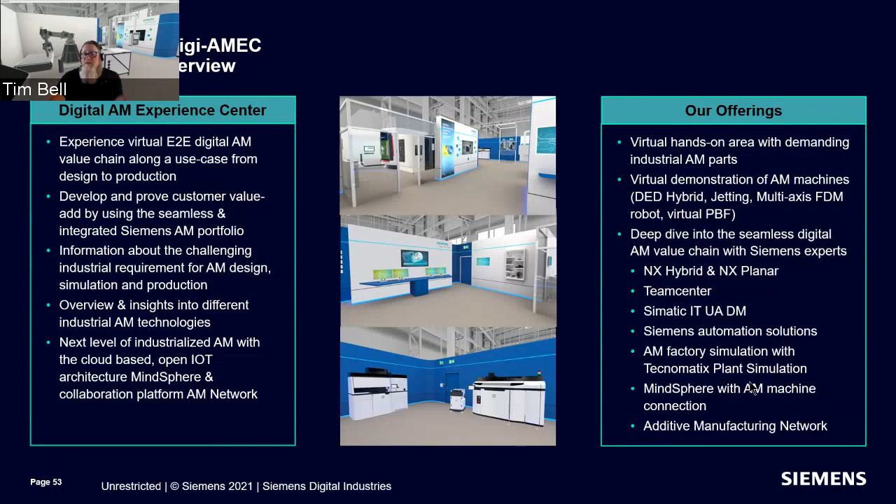To date, about 32 companies who were not using additive made the decision to start down the path because of their experiences at our Additive Manufacturing Experience Center. And then we actually help them through collaboration on that journey, help them plan that journey. What do they need? What kind of parts? How to train their people? So we bring these tools to the table. We don't just throw that elephant out there and walk away.

14 of these companies have reported back that without looking at AM as a complete digital process, they don't think their pilot programs would have been successful. And I would agree with them wholeheartedly. I've been in additive for a long time now, and I've seen it. I've seen companies try to bring additive in as a single piece and not look at it holistically, and it ends up being just making trinkets to go on desks, or it does a little bit of R&D work. But using it as a manufacturing tool, when someone takes this whole digitalization into account, they're much more likely to be successful.

A little bit about our Charlotte Advanced Technology Collaboration Hub. We are located inside of Siemens Energy's turbine engine facility. The right picture there you see is looking from our mezzanine over one of the most impressive assembly bays. Most of those engines are about 24 to 30 feet in diameter.

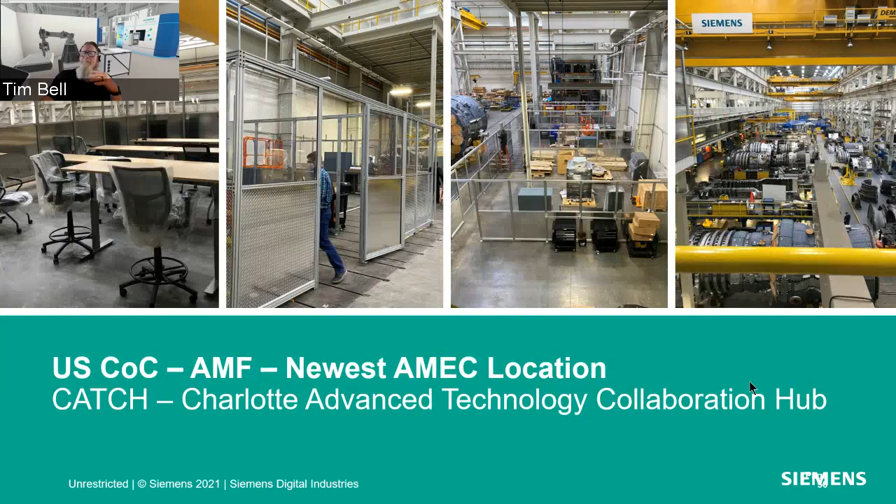Our focus areas at CATCH are obviously the Experience Center, so info tours, basic, but we're more focused on funded developments, whether it be internal Siemens business units or operating companies, or government institutional grants. We have a makerspace internal to Siemens, but most importantly is this collaboration hub. Today we have a dozen projects going on where we're collaborating with the printer OEM, whether from a hardware or software point of view, as well as our future of automation collaboration to advance additive. And we do a lot of end user collaboration projects as well as academic and industrial.

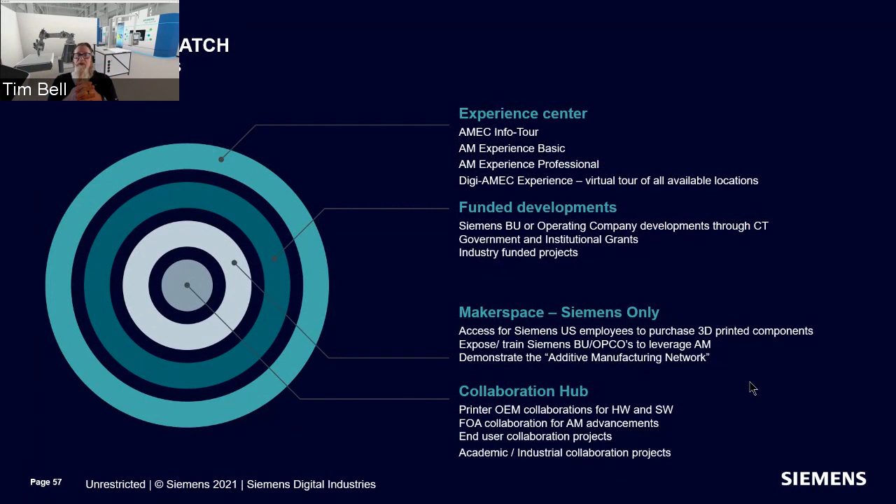When we say collaboration projects, it may be we go out and we apply for an NSF grant or something like that to do something, or an end user comes to us and says, hey, who should we be working with? Can you assemble a team of OEM builders, academia, industry to get together to solve some pain points or some problem? And that's the focus of CATCH in Charlotte.

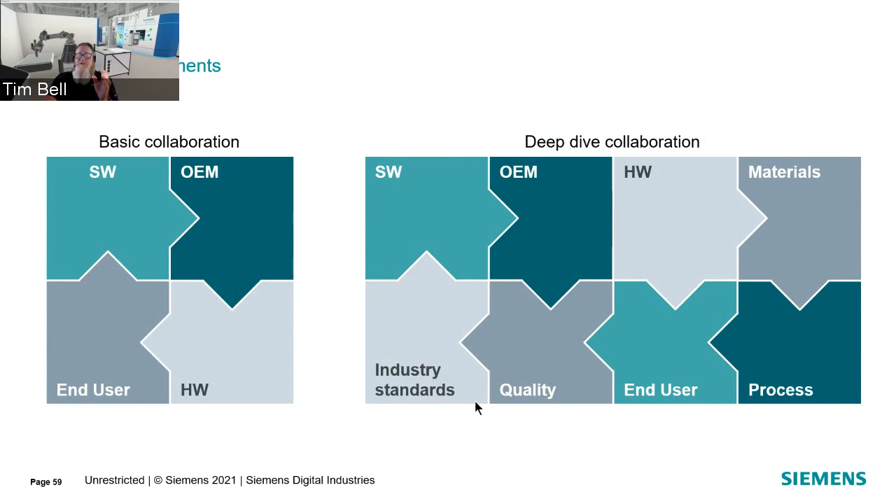Basic collaboration could be just software, OEM, hardware to an end user, or deep dives could get into materials and processes, quality, as well as industry standards. Several of us sit on the F42 committee, so we have an insight into what's going on there.

And then next, we're going to go on to doing a deposition. So we're going to build that area back up using DED, blown powder and laser. Then we'll go in and do a finish process to blend it all back in and do the final machining on it. Not every application in additive space works for hybrid situations. A lot of materials need post-thermal processing, but for a mold like this, it didn't require that.

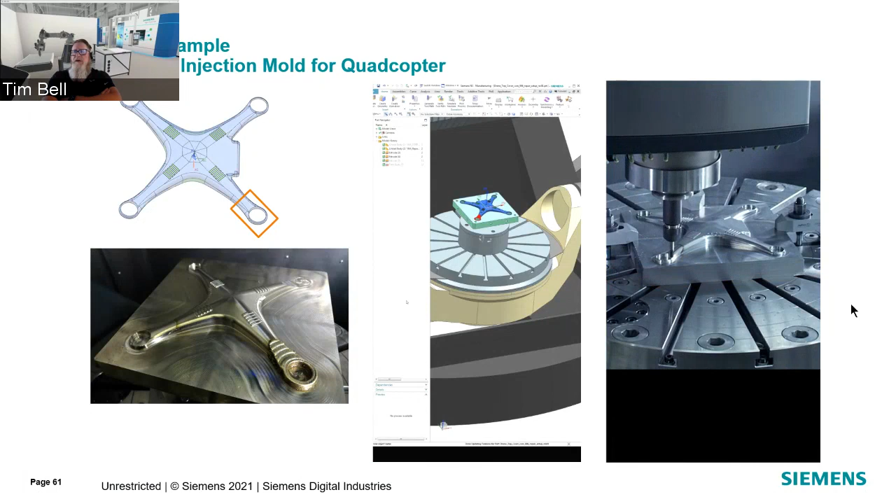And we've actually taken this to the next level. We have a project with a technology foundation, where we've taken a robot. We've used all these same tools, and we put a turbine blade in the cell with the robot. The robot brings a probe out, picks up the blade, compares it to the solid model, determines where the damage is, machines away the damage, prints back up the built area on a turbine blade, machines it back down, and then does a final inspection. And it does it autonomously.

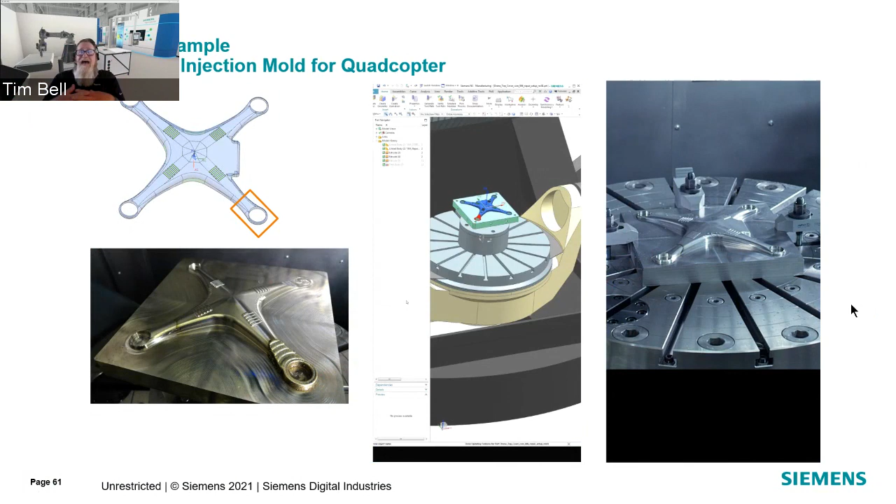We've been able to leverage our advanced software and hardware capabilities to do this because we actually install a CAM server inside of the control, because our Sinumerik controls are that powerful. So the success and the deliverables from CATCH are pretty simple. We want to enable the industrialization of additive with Siemens software and automation. We know we can only do this through collaboration. It can't be done alone. Siemens doesn't make machines. We don't do any of those things. We just help customers do their job better.

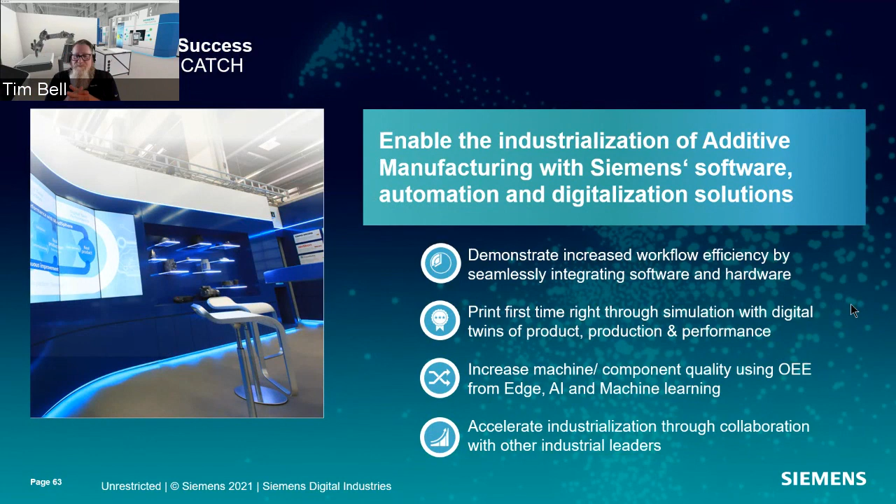I'm done a little early because I had two videos in there we couldn't show because we had audio problems.